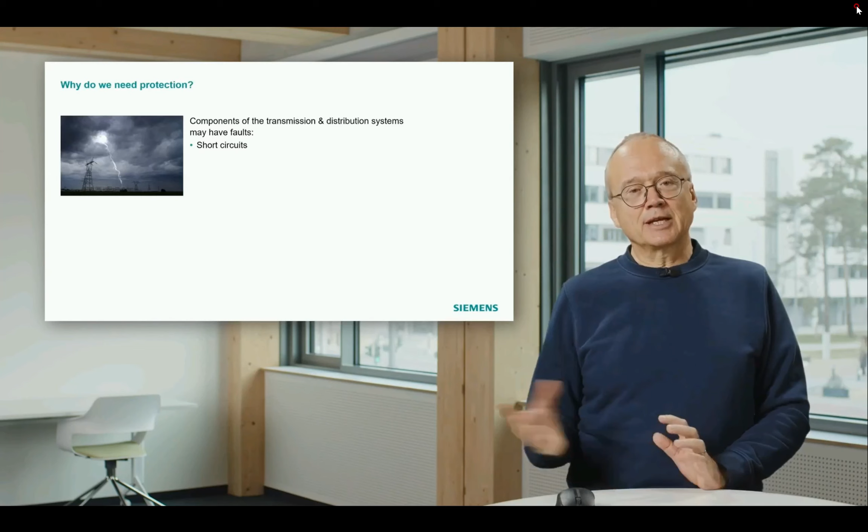If we look into our systems, components may have faults. You see here a nice photo of a thunderstorm hitting a substation, and it may start a short circuit in a substation. Another event could be street works, for instance, hitting a medium voltage cable in the street and also generating a short circuit there. That means short circuits will happen. Protection cannot protect against short circuits, but protection has to do something if a short circuit comes.

The main focus in this introduction will be short circuits, but you should be aware that we also have other types of problems like interruptions, overloads, overvoltage, undervoltage, and so on. So there are a lot of other things which can happen.

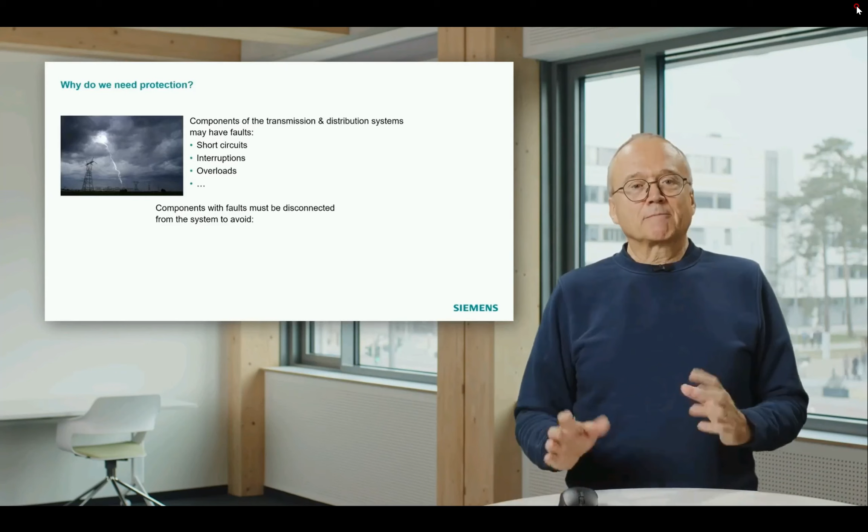So what do we have to do after such a short circuit? If we have a short circuit on a line or on a cable, this device has to be separated from the rest of the system. It has to be switched off, and the decision to do that is the main job of protection. That means components which have faults must be disconnected. If we don't do that, what may happen?

This nice picture shows such a situation. That is a picture from a real case. What you see here used to be a brand new transformer. During the commissioning phase, the different teams had some misunderstanding. That means in this case, the transformer was energized while the protection system was still not in operation.

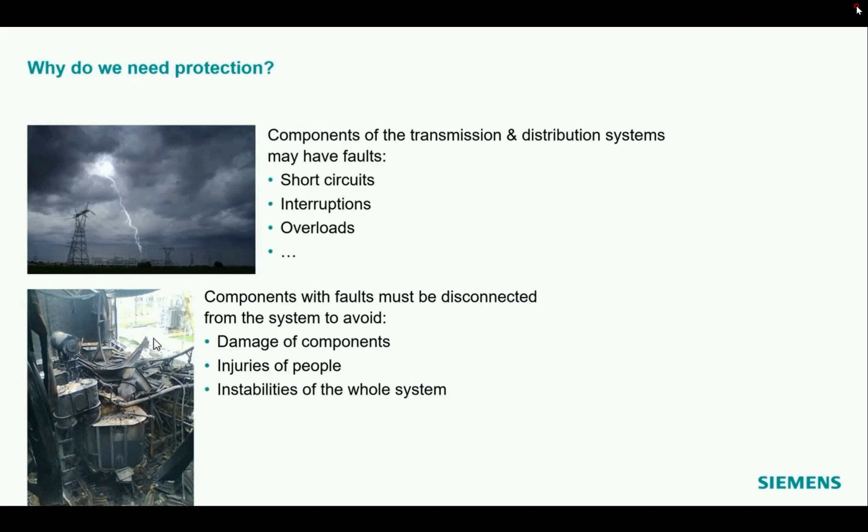And unfortunately, this transformer had a problem in the bushing. That means when the transformer was energized, there was a short circuit in the bushing, big current flowing, and what you see here is the result of that because the protection didn't work. So you see, not properly working protection can have severe impact. It can produce damage, and even more, it can produce injuries of people if they are standing around there, or it can also endanger the stability of the whole system.

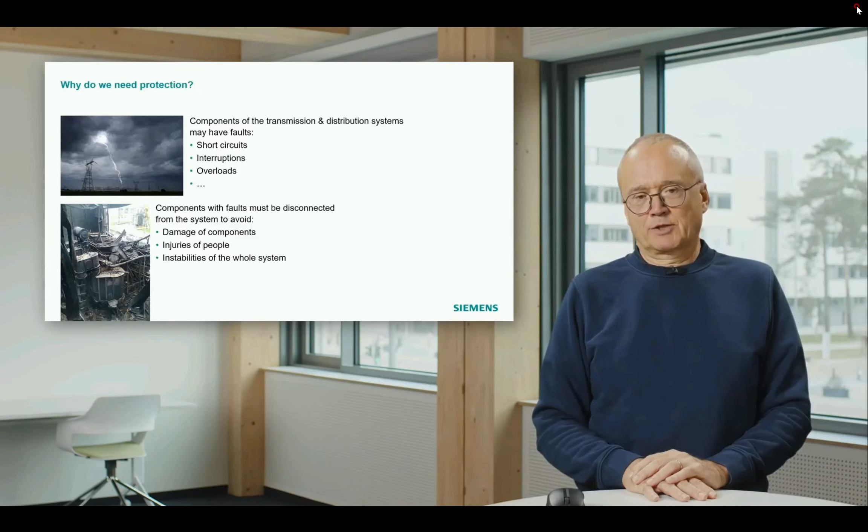That is mainly valid for transmission systems, for weaker transmission systems. Let me say for countries which are not interconnected very much to other countries. If in such smaller transmission systems a short circuit remains there for too long, and long can mean, for instance, 200, 300 milliseconds, then you can generate an instability of the whole system, which may lead to a collapse. So you see, protection is an important thing in the networks. And to understand where it is installed, we have to look a little bit into the network.

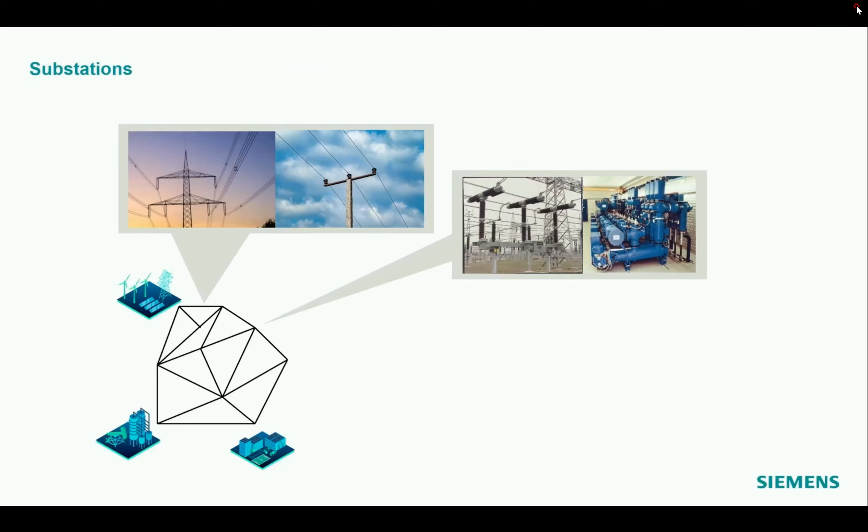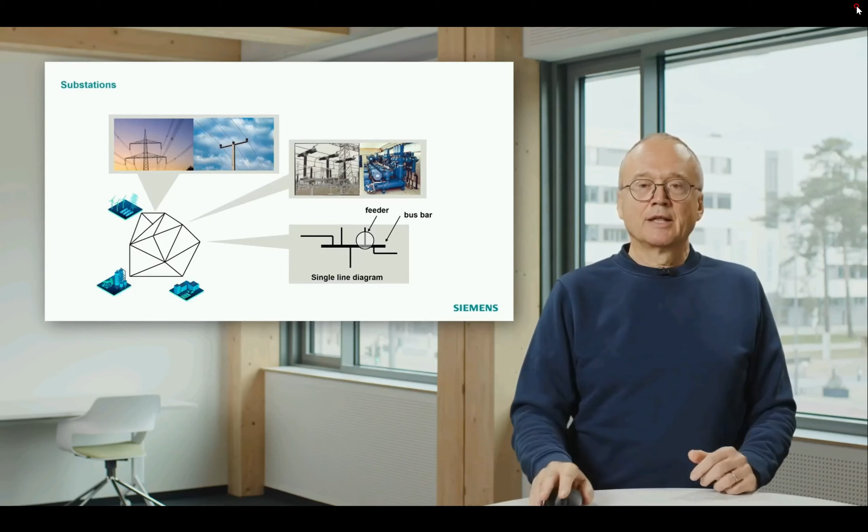The protection relay has to measure currents and voltages on the line to decide whether there is a short circuit or not. But as the line may have 20 kV, 132 kV, 400 kV or whatever, we cannot connect the line directly to the protection relay. We connect it via the so-called instrument transformers. That means the voltage is transformed down to a reasonable level, and also the big current which may flow, we may have 10, 20 kiloamps in case of a short circuit, is transformed down to a level which the protection relay can use.

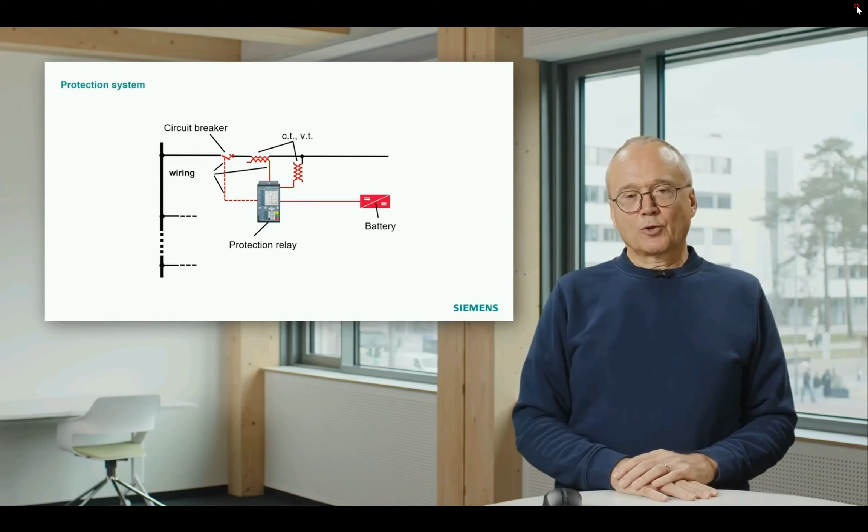Of course, wiring looks a little bit trivial in this sketch. Yes, it's trivial, but if you think about a big open air substation, then you have the circuit breaker, the VTs and CTs outside in the field. You always have to multiply what you see here by 3, because we have the 3 phases. And the protection relays are somewhere in a relay house. Now you can imagine you have a lot of wires, and these wires can be 100 meters long or longer. So sometimes things also happen with the wiring, so we also have to pay attention to that.

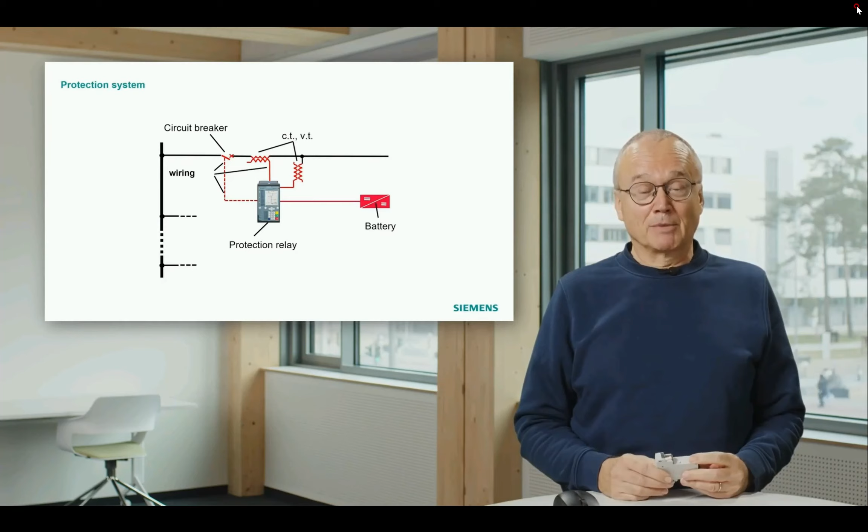We can compare this arrangement a little bit with what you know from your home. This is an MCB you have at home, and this one does protection for your low voltage system at home. And it's worth looking at the differences. What does this one do? What does our protection relay do in a substation? Their job is pretty much similar, but on the other hand, there are differences.

This device here directly measures the current. In this case, it has only current. That means the current flows directly through this device. It makes the decision. If it says, okay, there is a short circuit, I will trip. It also interrupts the current.

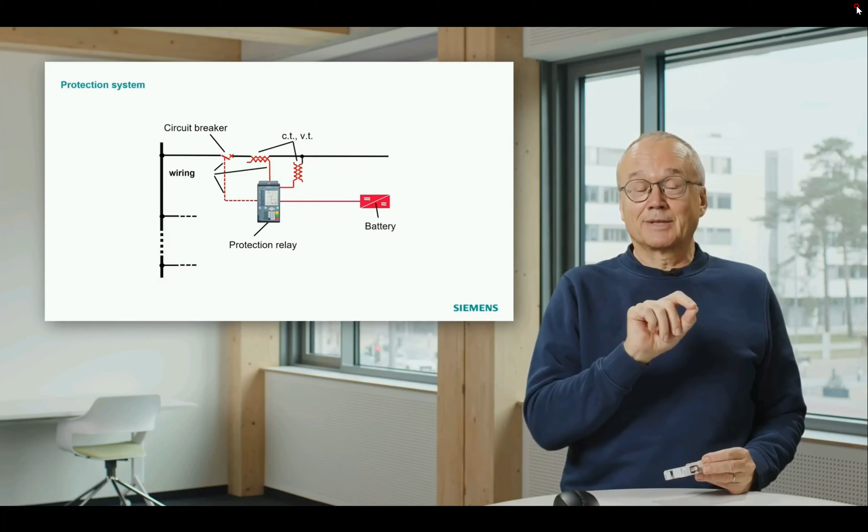What our protection does is only half of that. It cannot measure the current directly. It gets the current and voltage measurement through current and voltage transformers. But the important thing, it cannot interrupt the current itself, it can only give a trip command to a circuit breaker. That means our protection relay roughly does half the job of such an MCB, but of course in a much more sophisticated way.

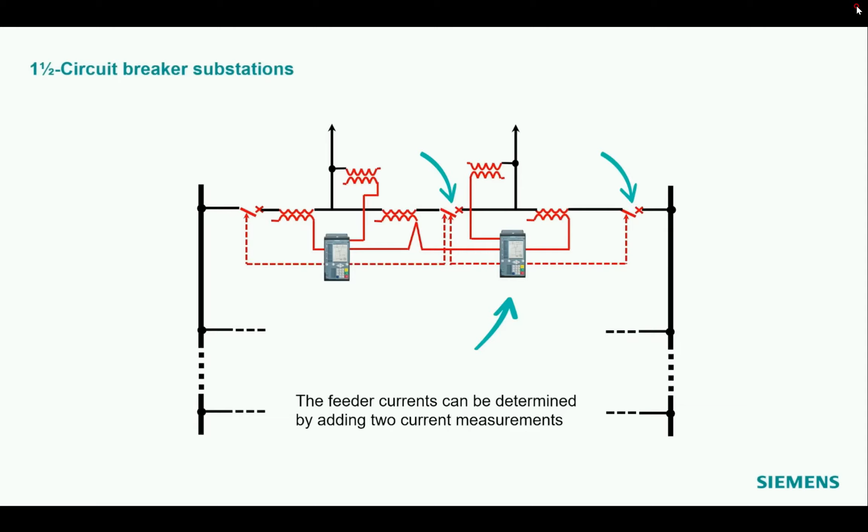You also see voltage transformers and current transformers here. In this case, the situation with the voltage transformers is pretty easy. So we have a voltage transformer on the feeder. That means the left-hand relay measures the voltage on the left feeder. The same applies to the right one. The current measurement is a bit more tricky in this case. As you see here, the current transformer is not in the feeder. The current transformer is here, or several current transformers are here in this so-called diameter. Diameter is this horizontal connection between the 2 bus bars.

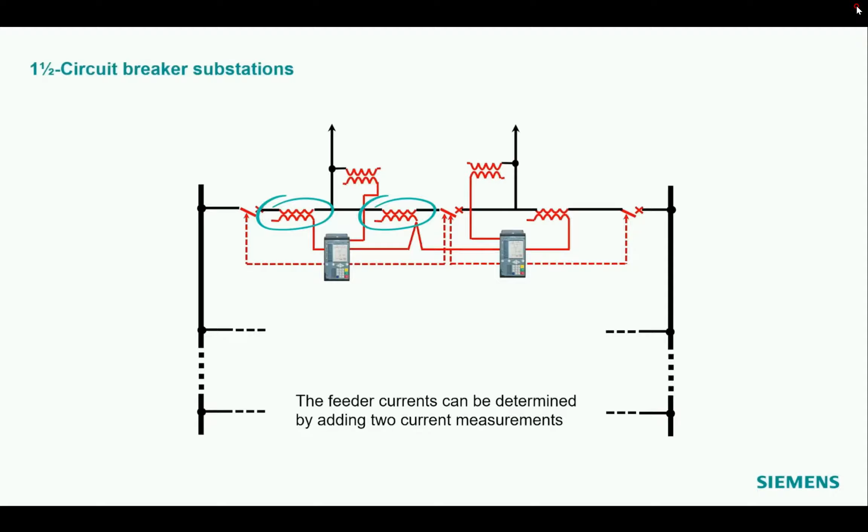And in order to measure the current in the feeder, for instance in the left-hand feeder, the protection relay has to sum up 2 current measurements in the diameter, and just by summing up the currents it can measure the current in the feeder. But the rest behind that, the protection principle, the way to identify short circuits, is the same as in the previous drawing. This is called breaker and a half substation, and the decision whether we build single or double busbar substations or such a substation, that comes from the primary system, from the high voltage system. The protection people have to adapt to that.

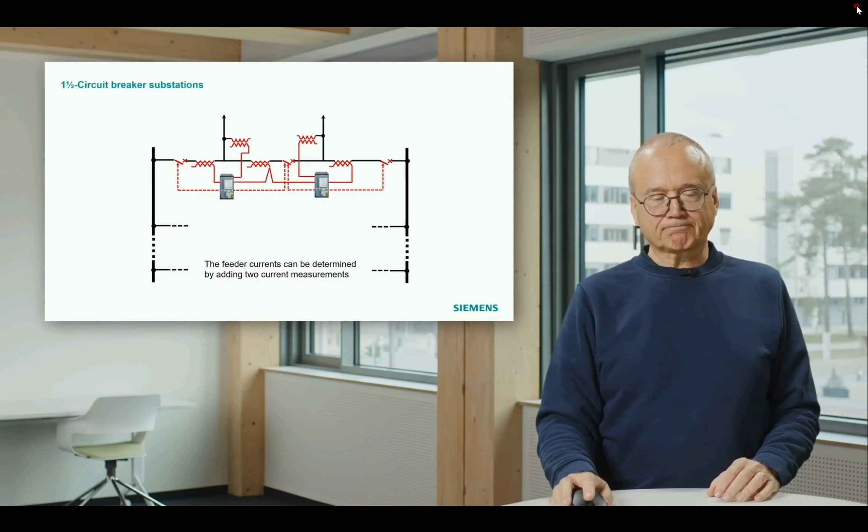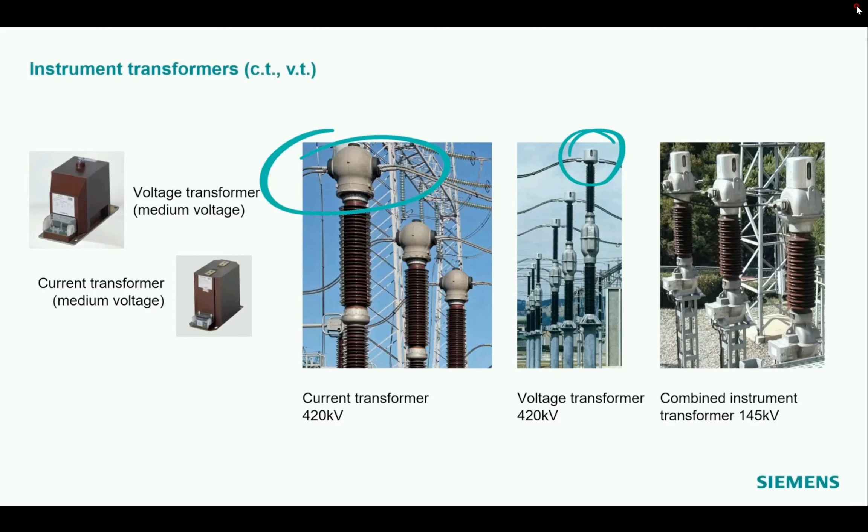On the right-hand side, we see the same story for the higher voltage levels, in this case 400 kilovolt. In this case, you don't need more power in the current transformer and the voltage transformer. These things are just bigger because we need more insulation, because we have to measure a voltage on a 400 kV level and need insulation for 400 kV. You see here a current transformer for 400 kV. The current flow is here through the top of this thing. We also see a voltage transformer where the voltage is connected, and our protection relay is connected somewhere down there.

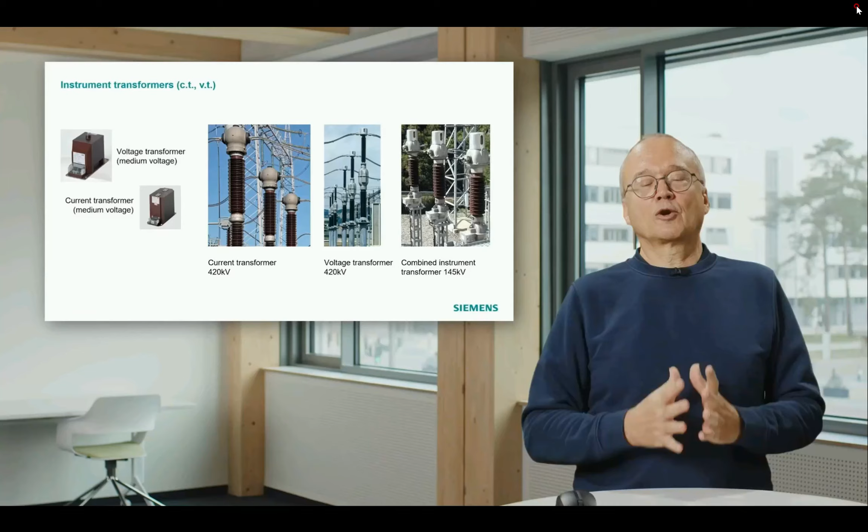Just on the right-hand side, you see a combined instrument transformer. It is a combination of a current transformer and a voltage transformer in one device, because normally we need both measurements, current and voltage. And what you also see here is again the three phases. That means if we talk about one voltage transformer, we normally talk about 3 devices, 1 per phase.

Now let's talk a little bit about the requirements to protection, and there we often mention the 3 S. That means speed, safety, and selectivity. So let's look at this a little bit more.

What does speed mean? Imagine speed is pretty important. Remember, short circuit, lot of current flowing, risk of damage of components. That means we must be fast to disconnect the fault if we detect one. And in protection, fast means something like a few milliseconds up to 100 milliseconds, or in cases even more when we have to do compromises.

Getting enough speed is, on one hand, a question of the algorithms. That means on the manufacturer side, developers have to invest brain into fast algorithms, especially for the high voltage, extra high voltage levels. But speed is also influenced by the protection concepts. And you will see in the second part of this webinar that we sometimes have to do compromises when building up the protection concepts, which will lead to delayed tripping. That means we have to reduce speed for some reasons.

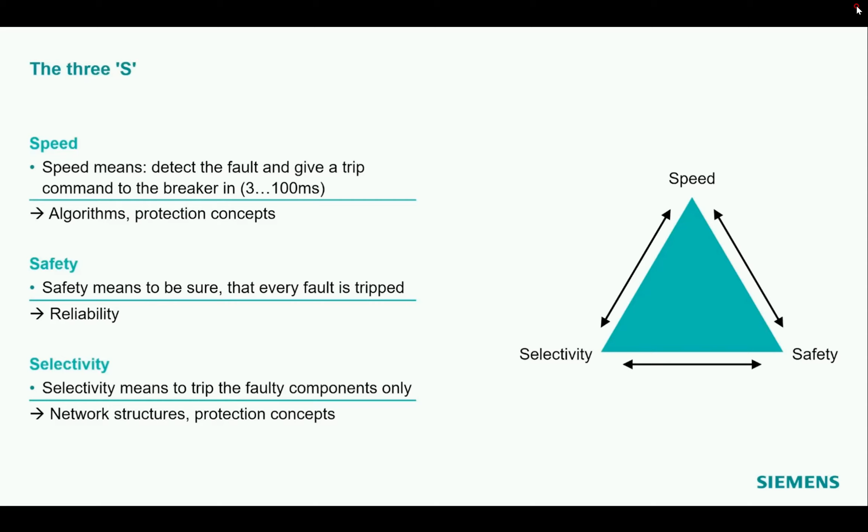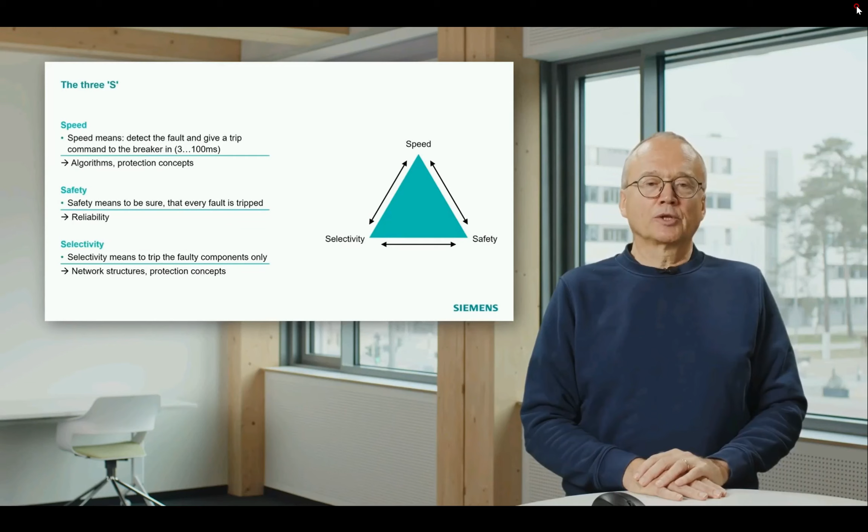And this thing is called selectivity, that only the faulty component is disconnected from the rest. And that is a very important issue, and we will have several chapters dealing with what we can do to get selectivity. That is the end of this basic chapter of this introduction. And in the next chapter, we will see what aspects we have to consider if we want to put together a protection scheme. Thank you.

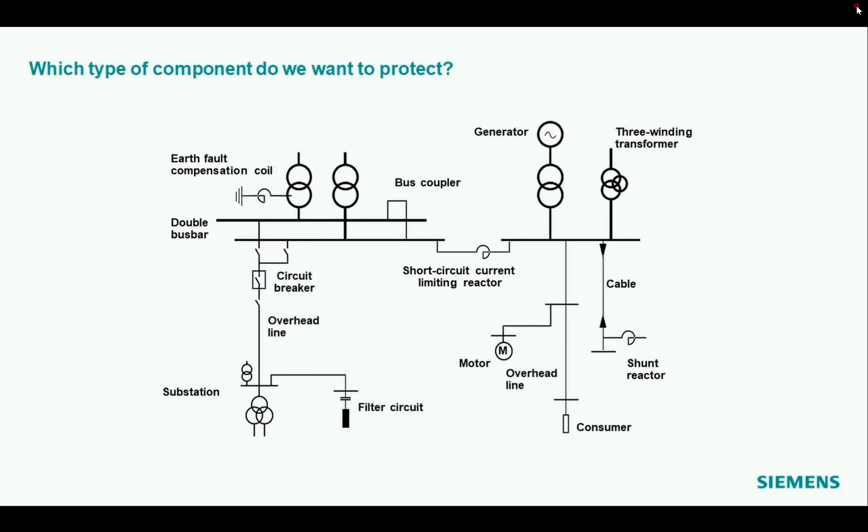So what aspects do we have to consider if we want to define a protection scheme? So you already realize there is a strong relation between protection and the network. That means we have to look a little bit into the network. And the first question is, of course, what type of component do we want to protect? This picture just shows a mixture of all the different components which may be available in the network. Of course, the majorities are lines and cables, transformers. What you also see here is generators, motors, and other special things. Bus bars are also important.

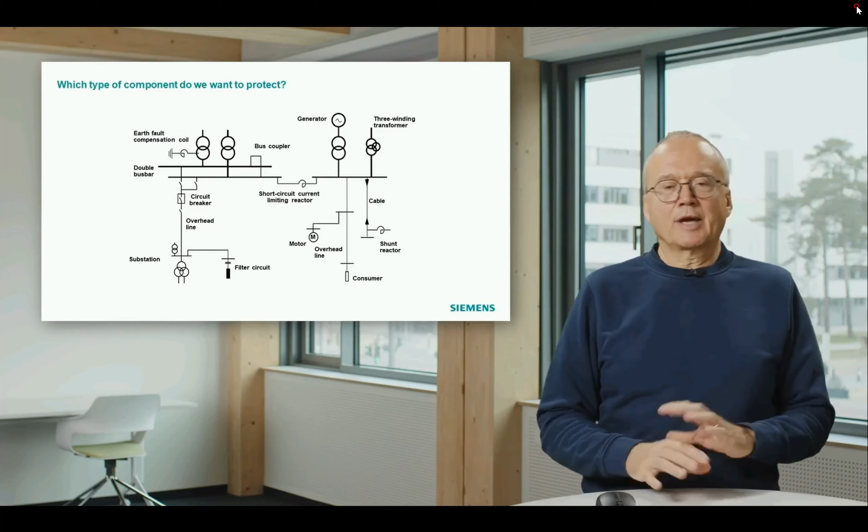The focus here in this introduction will mainly be on network components. That means transformers, bus bars, cables, and lines. The focus will not be generator protection and motor protection, because there a lot of different things have to be considered. So one thing is the type of component. The next thing we have to look at is the voltage level.

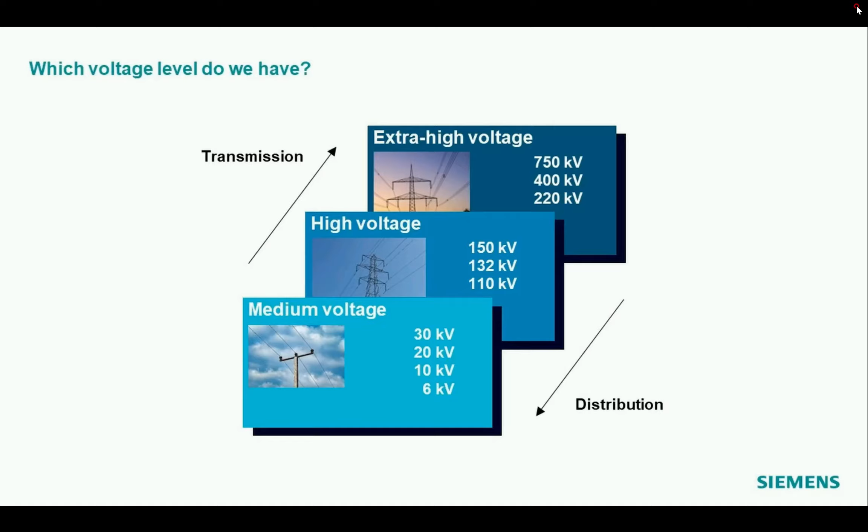This starts from the extra high voltage level, from the transmission network level, and it depends on the country, on the area of the world where we are, which voltage level we find there. It can be something between 220, 400 kilovolt, 750 kilovolt, or trials are already done with even higher voltages. The voltage level which is used depends on the size of the country, the distances, and the amount of energy we have to transport. Always remember, for the protection relay, the voltage level doesn't make a big difference because the voltage is always transformed down to that level which is seen by the relay.

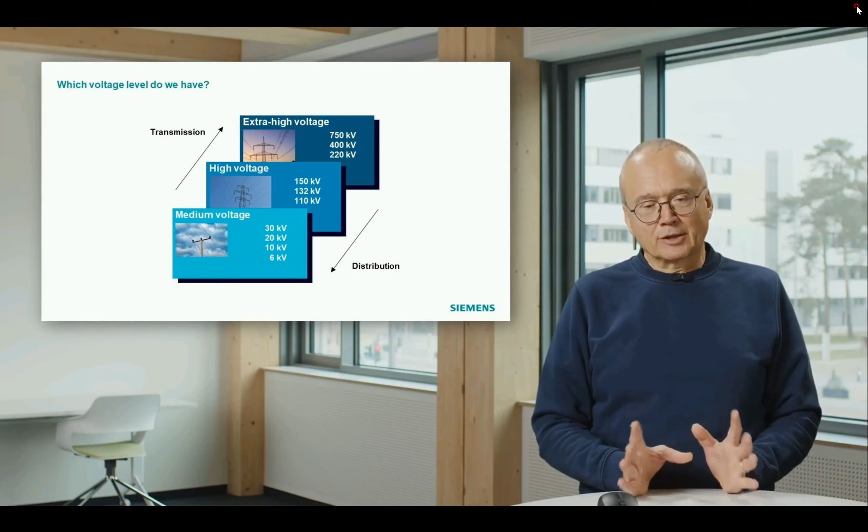But the concepts to do protection are different in high voltage level compared with medium voltage. Below extra high voltage, you have typically the so-called subtransmission level. Also there, the voltages are different in different areas, 110, 132, or 150 kilovolt. And below that, you have a medium voltage level, which does really the distribution of the energy into the cities, the villages. These are often cable systems, but it can also be overhead lines like shown in these pictures. And the voltage levels we cover here with this technology start typically from 6 kilovolt up to, for instance, 30 kilovolts in the medium voltage level. Those are the voltage levels.

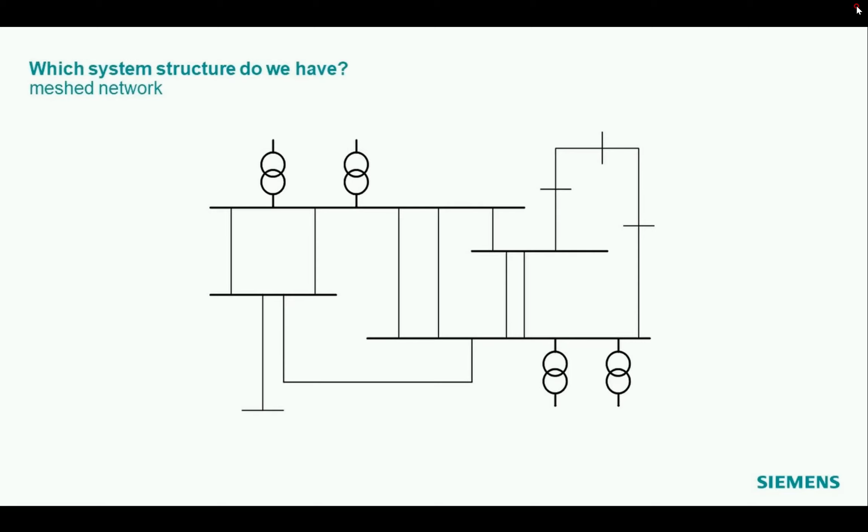We also have to look into the network structures, and they depend a bit on the voltage level. What you see here is a mesh network. That is what you typically find in transmission systems, in subtransmission systems. That means we have a mesh system which has grown somehow, which connects the power station, the generation, and the loads. That means the transformers you see here connect the power station to the grid, and they can also be connections from these transmission networks to subtransmission or to distribution.

Important thing here for protection is we have a meshed structure. That means if we have a short circuit somewhere on one line, the current comes from different sides, from different directions into our line. And that is an important fact to define the protection.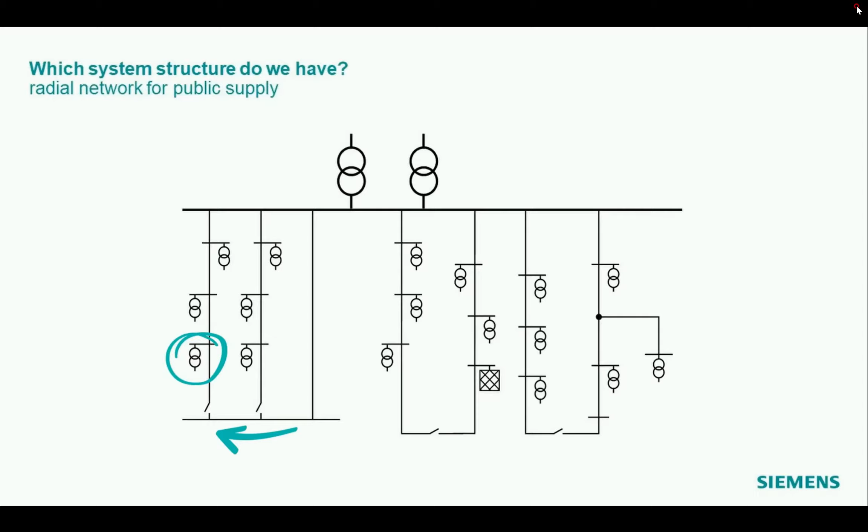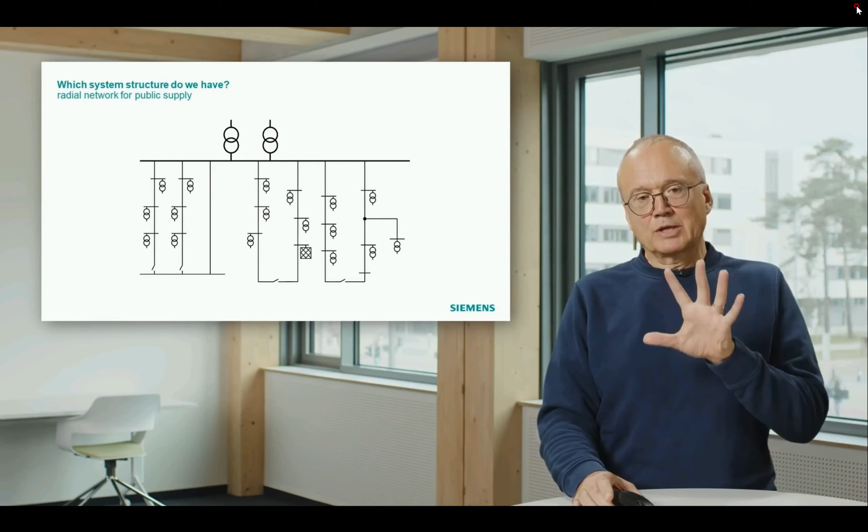That means normally you have a radial system, and we will see that's important for protection. After protection has worked, you can reconfigure the system. That will take some time, depending whether you have remote control or you have to drive there to reconnect that. Important point here is normal operation is a radial system.

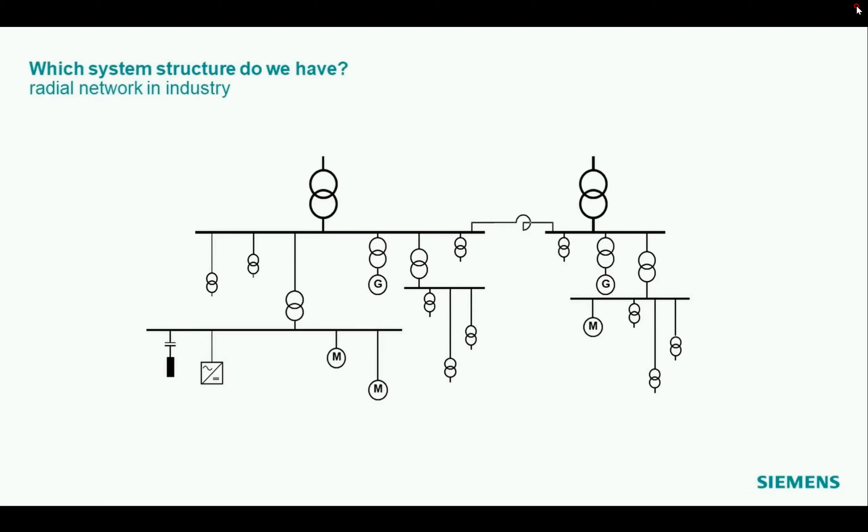Similar things are normally visible in industrial systems, like shown here. These systems are often also radial. The difference in comparison to the public distribution systems is that here the distances are normally shorter. So we are here within one plant, chemical plant or refinery. Distances are shorter, and we normally have a lot of motors involved here. But also there, the main question for protection is, do we have meshes or is the system a radial system? That was the system structure.

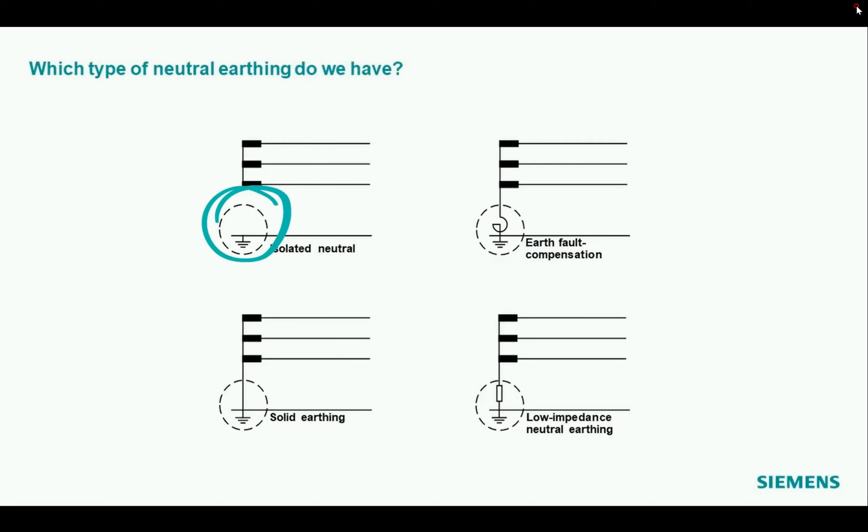And you can do even more things. You can put in a reactance here. And with such a reactance, you can bring down the short circuit current even to zero, or you can leave this open. That means if you have a reactance here or if you have the star point open, you have pretty low currents in case of a phase-to-ground fault. You can even continue operation without risk of damage. So the earth fault in this case is not really a short circuit because there's only small current flowing. That's the good thing. But on the other hand, you must find that fault. You can continue operation for seconds, even for minutes.

But you must find this type of fault. That means in such a case, you must have additional protection functions to identify and to find out where this type of fault is. So that is a special area of protection in these networks.

That means if you think about a protection system for a network, you must have a look at this star point treatment. As I said, in transmission systems you are typically with solid earthing. In distribution and industrial systems, you find a lot of other different things. That was the neutral earthing.

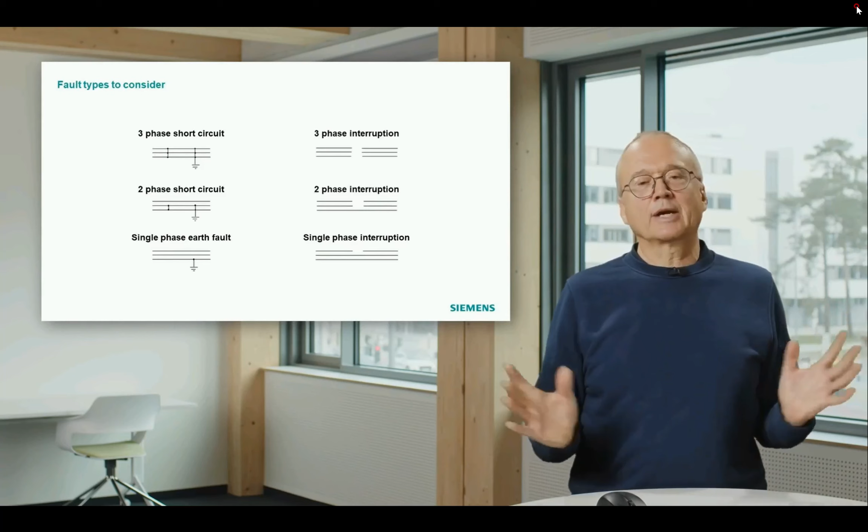And the last thing I'd like to mention here is, what types of fault do we have to consider? On the left-hand side, on the bottom, you see the most frequent type of fault, single phase to ground fault. This will occur typically, for instance, if a lightning arc hits an overhead line, you have an overvoltage there, you get a flashover on a tower, and then you have a phase to ground fault. And you can assume that roughly in an overhead line system, 80 to 90% of all short circuits are single phase to ground short circuits.

Sometimes they evolve to a phase to phase to ground fault. That means if you have on one tower a lightning arc burning, a short circuit burning on the tower, there's a lot of hot air flowing around there, and that sometimes affects also another phase. Then you get this fault. And of course, you can also have just a short circuit between two phases, for instance, if the conductors of an overhead line start some oscillations.

And of course, there is also a risk of a three-phase short circuit. That is not very often. A typical thing, for instance, would be in a distribution system. You have roadworks there, people opening the street, didn't look at the cable plans before, excavator hits the cable, and either you get an interruption or you get a short circuit, or both. That's one reason why you have three-phase short circuits.

Another reason can be you did maintenance on a line. If you do maintenance on a line, you have to ground the line. That means you have to connect all the three phases together to ground. Then you can work on the line. After you have finished your work, you want to reconnect the line. And if you then forget that the grounding is still there and energize the line, you have a three-phase short circuit and the protection has to trip. So those are the types of short circuit.

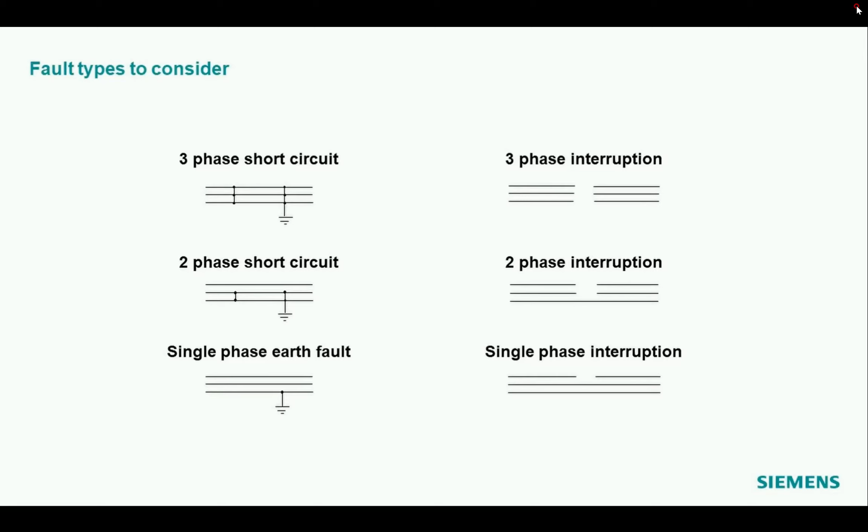But if you, for instance, supply a big motor in a chemical plant and you have a single phase interruption, a motor doesn't like that, or a generator, because these motors and generators need a three-phase system to have a constant torque. And if one phase is missing, you can destroy the devices. So for that reason, also these types of faults sometimes have to be disconnected.

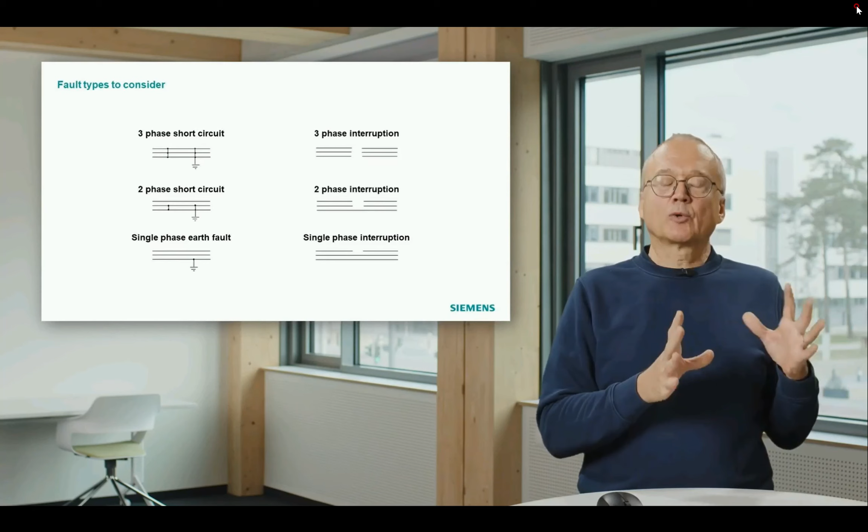So we come to the end of this chapter. We looked at the different aspects of the network which have to be considered to bring together a protection scheme. And in the next chapter, we will look at the protection principles which are available to detect short circuits.